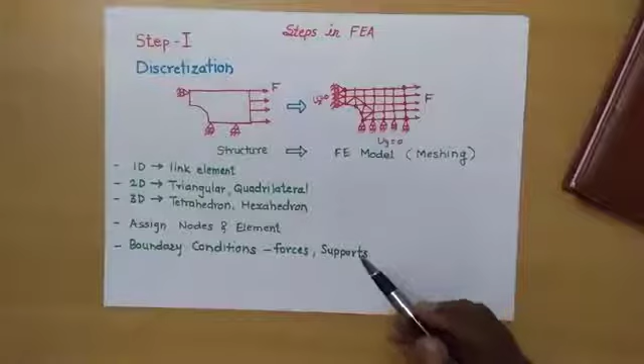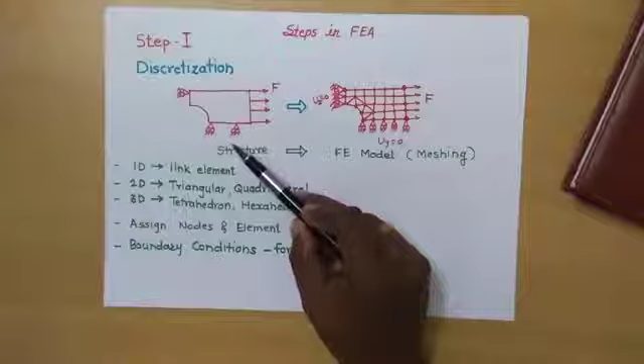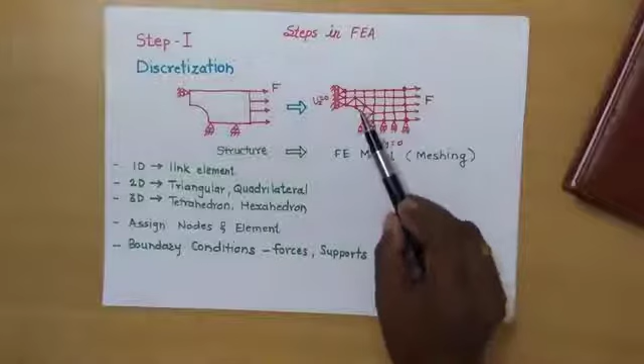We will start with step 1, which is discretization. In this discretization we will get some problem, and any problem, structural or otherwise, is converted into a finite element model. This finite element model is a combination of nodes and elements. The formation of these nodes and elements is called meshing in finite element analysis.

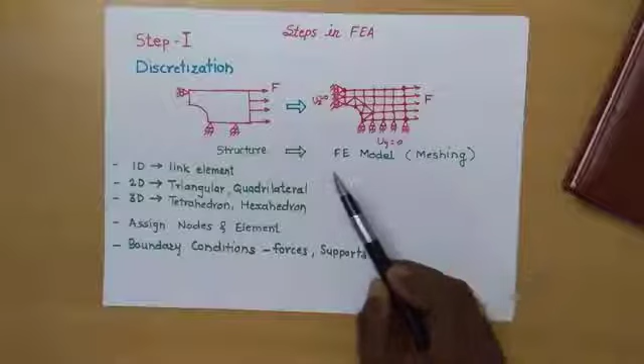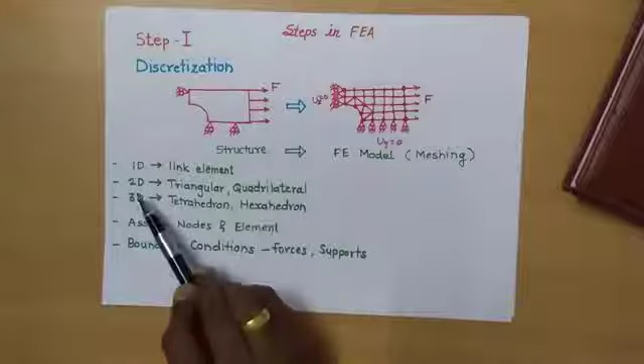We can convert according to the problem. If it is a 1D problem, we can convert it into a link element. We can use a triangular or quadrilateral element if the problem is 2D. If it is a 3D or solid problem, we will use tetrahedron and hexahedron elements.

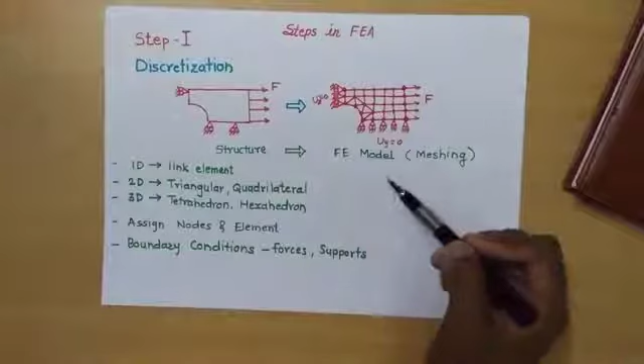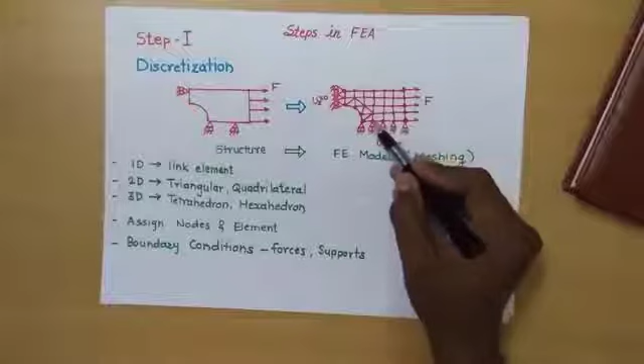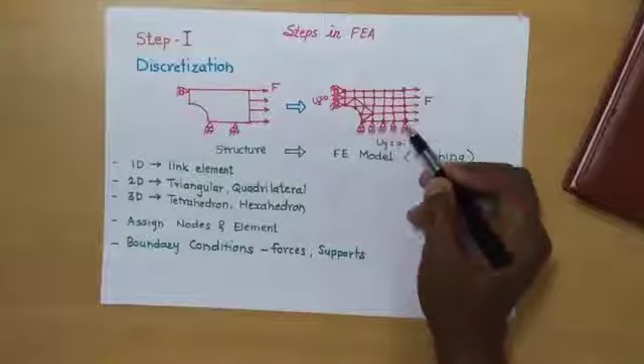We have to assign total nodes and elements in the system. For example, here we have defined this structure into a finite element model. We can assign numbers from here, 1, 2, 3, 4. Likewise, we will give the element numbers, and according to that, we will give node numbers. These are the node numbers, and the next step is to define the boundary conditions.

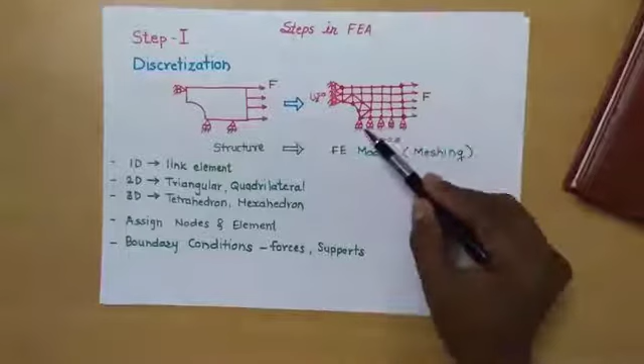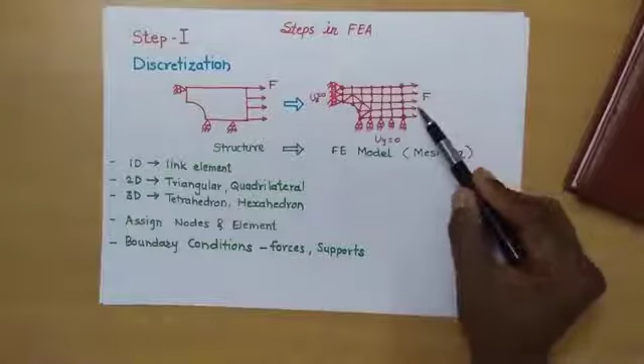Here we have some fixed supports and roller supports. Accordingly, for particular nodes we give the supports, so this displacement is 0, this displacement is 0, and force is applied on these nodes. So we convert the structural problem or any other problem into a finite element model. This discretization is the first step.

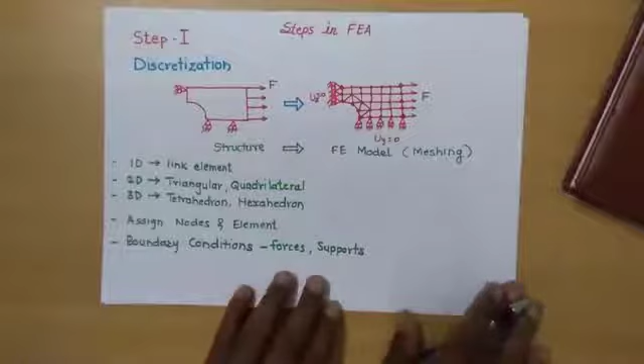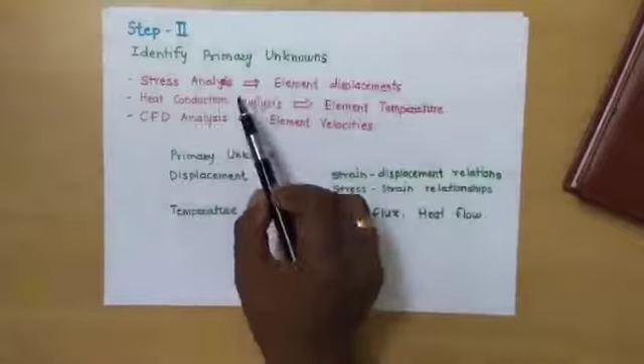Second step is identifying the primary unknowns. What do we mean by primary unknowns? We get the first unknown, which is displacement in structural analysis. This means if we do the structural analysis for stress, we have to find out the displacement first.

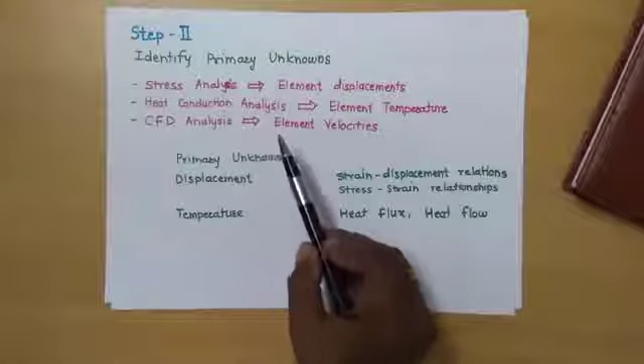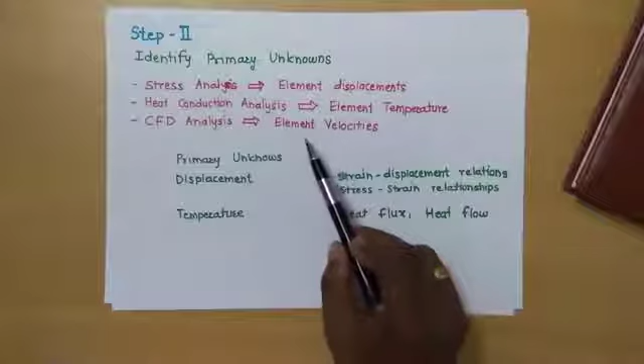Then we will see heat conduction analysis. In this analysis we need to find out the element temperature. So this basic unknown is called a primary unknown. In CFD analysis we have to know about element velocities. Then we can find out different unknowns required in this analysis.

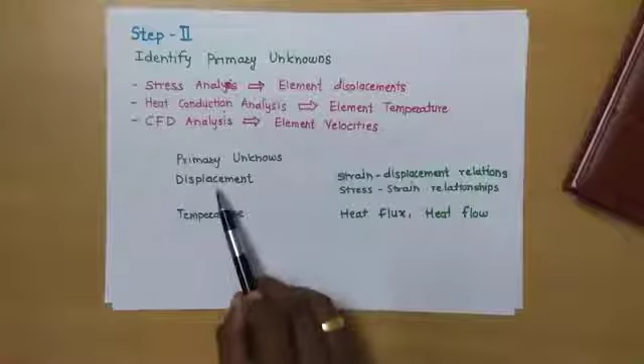For example, here it is displacement, so the primary unknown is displacement. The secondary unknowns become stress and strain. Stress and strain can be found out using the stress-strain relationship or strain-displacement relationships. These relationships come from the theory of elasticity.

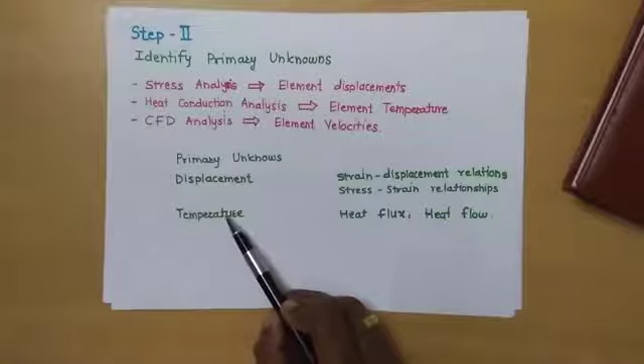If we know the primary unknown, temperature, then we can find out the heat flux and heat flow using some relations. Those are called secondary unknowns, and these are called primary unknowns. So identify which is the primary unknown in your problem and then start.

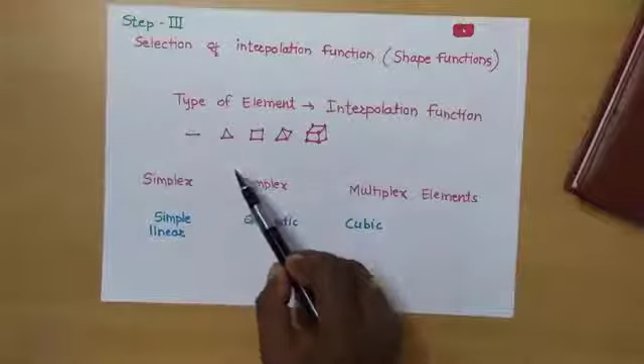So our next step is step 3, selection of a proper interpolation function. Interpolation functions are also called shape functions. In this problem, if we define it with the help of these elements, we need to define a proper shape function for these elements.

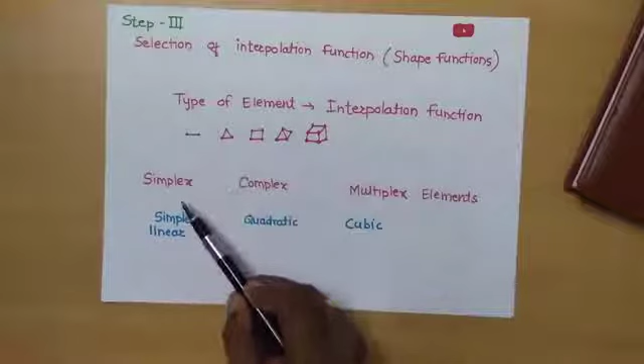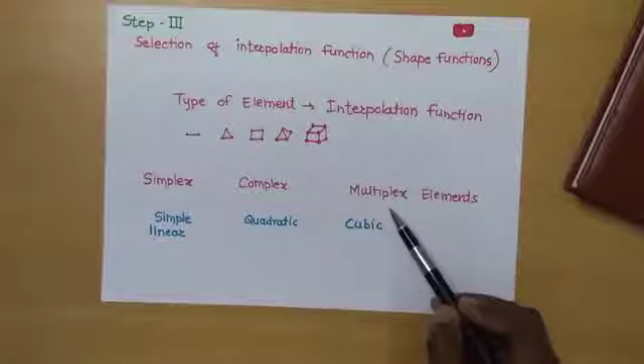Suppose the elements are simplex elements, we will use simple linear polynomials or interpolation functions. If it is complex, then we will use quadratic shape functions. If it is multiplex elements, we will use cubic shape functions. You can find an explanation about simplex, complex and multiplex elements by clicking the eye icon here.

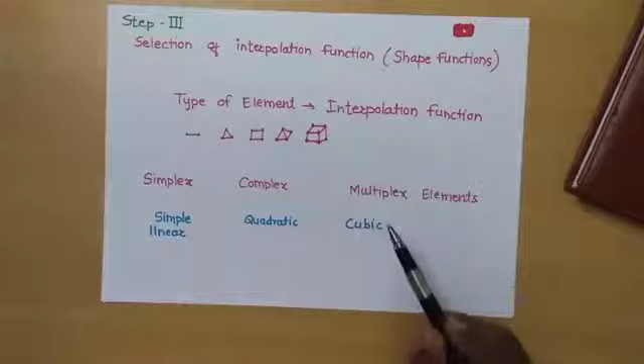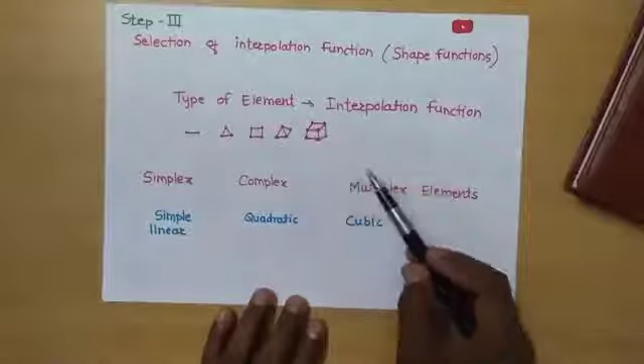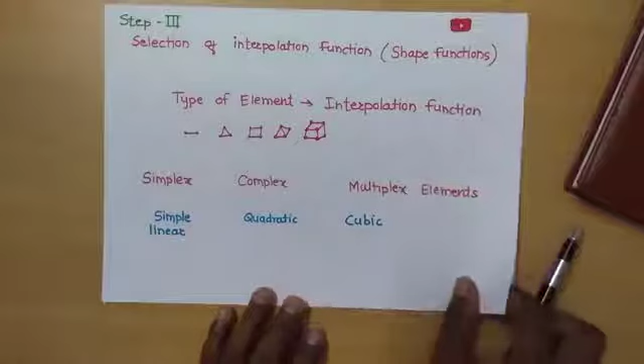Interpolation functions define the shape functions because we get the values at the nodes, and intermediate values in between the elements we get using these shape functions. That's why shape functions are more important to get accurate results, because nodal values may not be accurate if we solve it the linear way. So we need more complex and multiplex elements, and quadratic and cubic shape functions.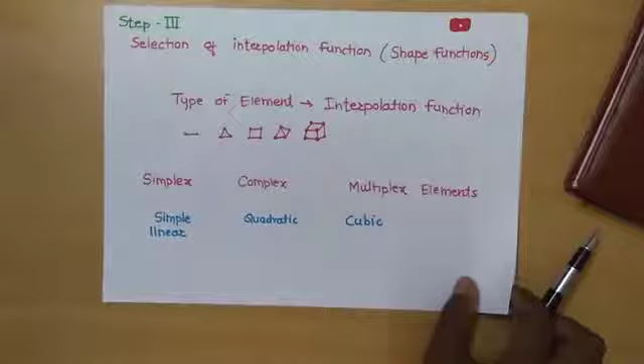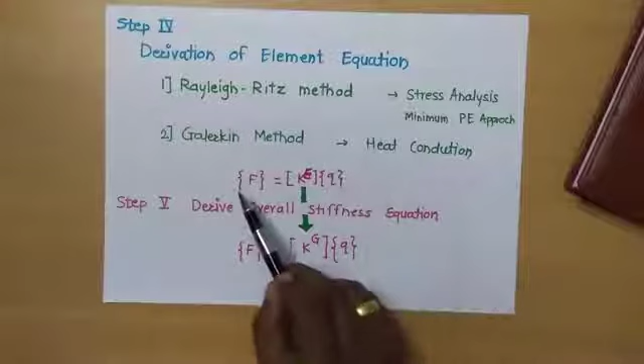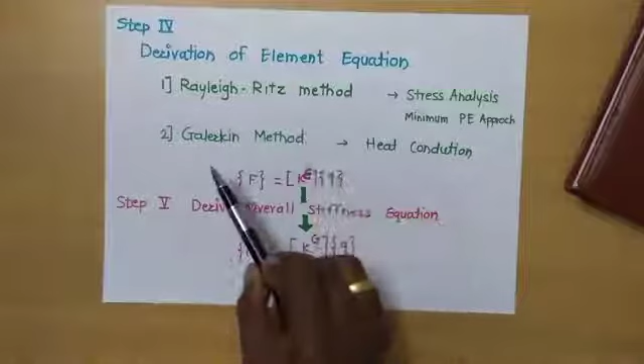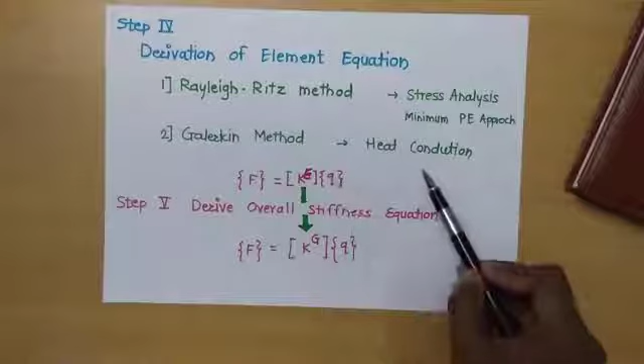So we use the minimum potential energy approach in the Rayleigh-Ritz method, and for some problems we use the Galerkin method. So for each element we will get force is equal to stiffness into displacement, and then the next step is step 5, derive the overall stiffness equation.

Means if there are n number of elements, we will get n number of equations, one for each element, and these n equations we need to add together to get the global stiffness of that system. Forces are added accordingly, and we will get the force vector. Displacements are added accordingly, and we will get the displacement vector.

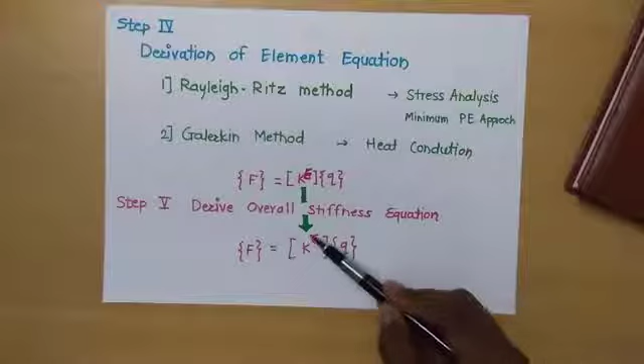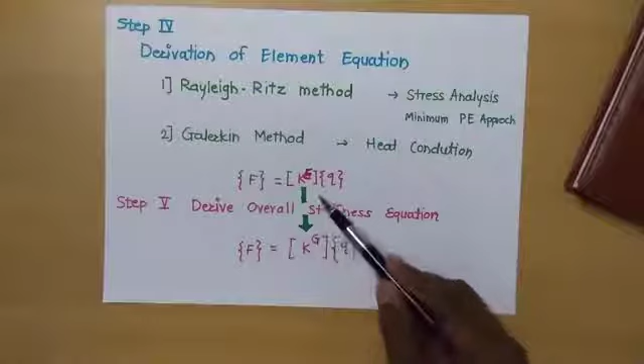To form this global stiffness matrix, each element is connected to the next element with some nodes. According to that, we will connect all these elements together to form the global stiffness matrix. So this stiffness matrix gives you the whole stiffness of your problem.

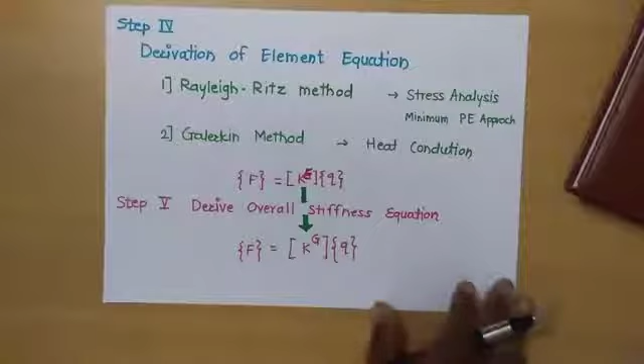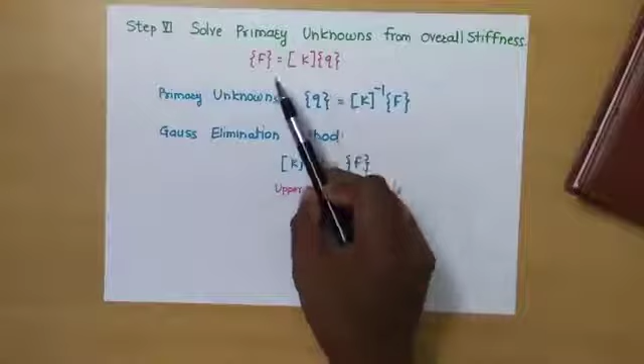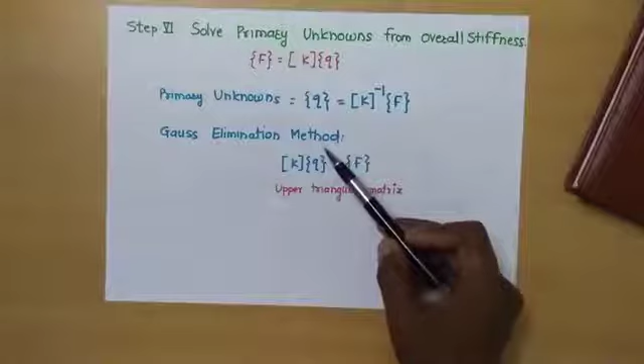Now once we get the whole system equation, that is force is equal to stiffness into displacement, we have to solve these system equations to get the primary unknowns from this overall stiffness. There are many methods we can use to find this Q value. Q is the primary unknown. We can simply take the stiffness matrix to the other side, make K inverse and multiply by the force vector, so we will get the displacements directly, or we can use the Gauss elimination method.

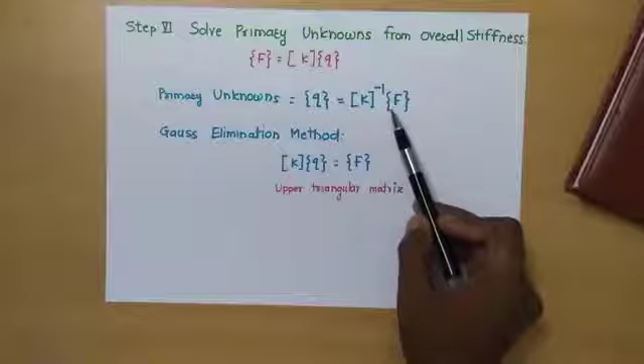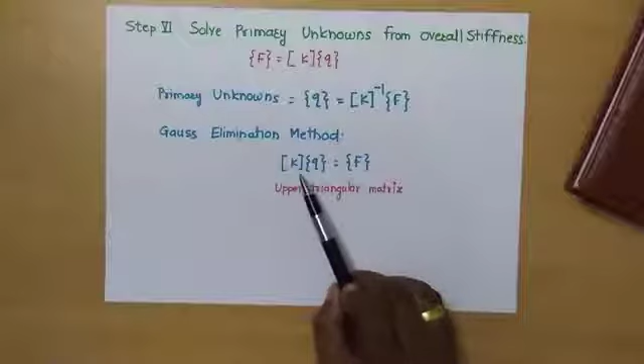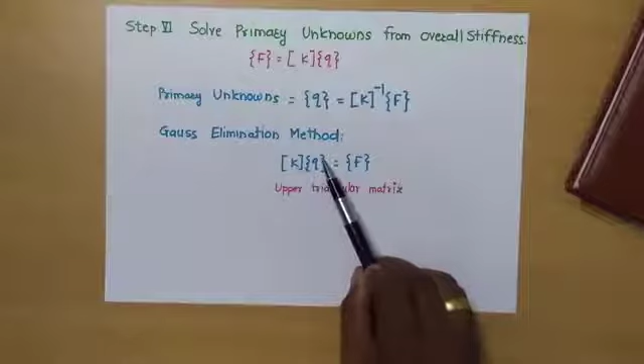What happens in the Gauss elimination method? We have to convert this stiffness matrix into an upper triangular matrix, and one by one, starting from the last value of the displacement, we will get the exact value for this last displacement. So likewise we can solve these equations simultaneously. We will get all these primary unknowns, and we can use relations again to get the secondary unknowns. This is step number 6.

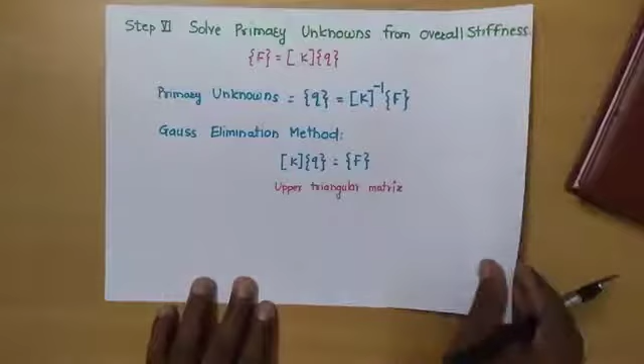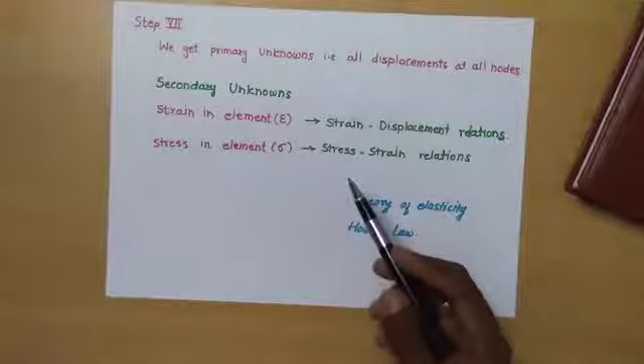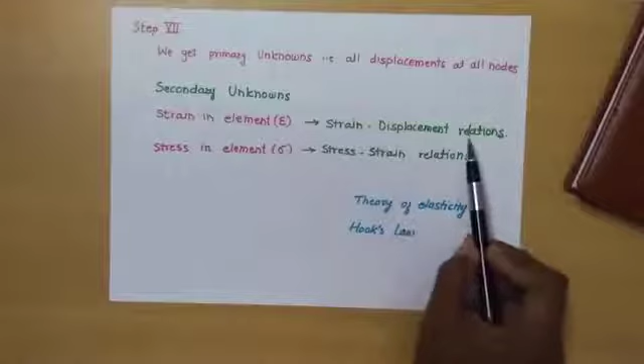Step number 7 is to get the secondary unknowns. Once we have all the displacements, we have the displacement vector. If we want to find the strain, that is epsilon, we use the strain-displacement relationship, which comes from the theory of elasticity. We can derive these relations, and if we put the value of displacement in that equation, we will easily get the strain in each element.

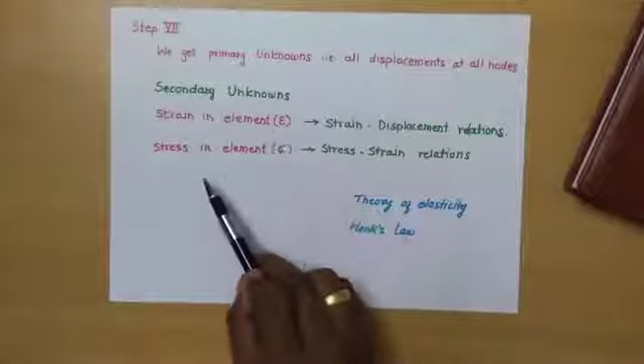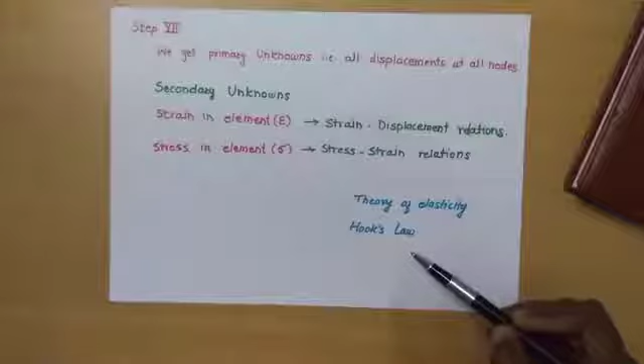If we want to find the stress in the element, there is the stress-strain relationship, derived from Hooke's law. It is applicable for 1D, 2D and 3D. So if we know the strain, we can find the stresses in each element. Now if we want it at the middle of the element or somewhere inside the element, we can use the interpolation function, that is the shape function, to find the stress inside the element.

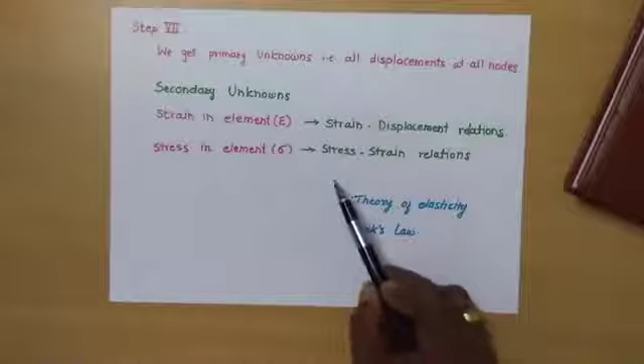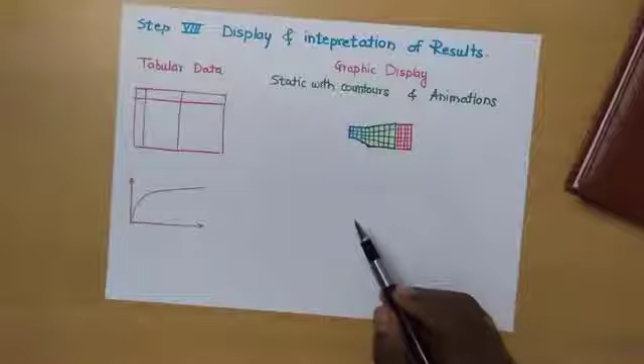Okay, and the last step is step number 8, display and interpretation of the results. Once we are done finding the primary unknowns and the secondary unknowns, we have to collect the result data. There are two methods: the tabular data method, and second, the graphical display method.

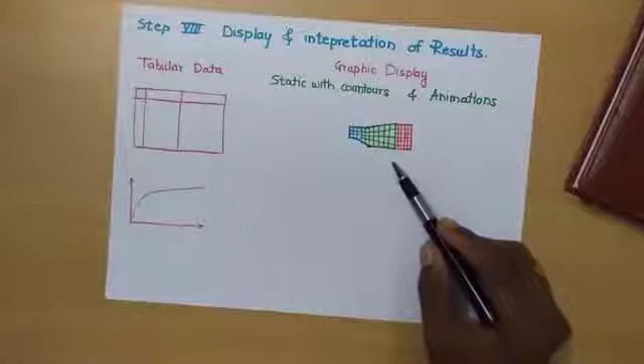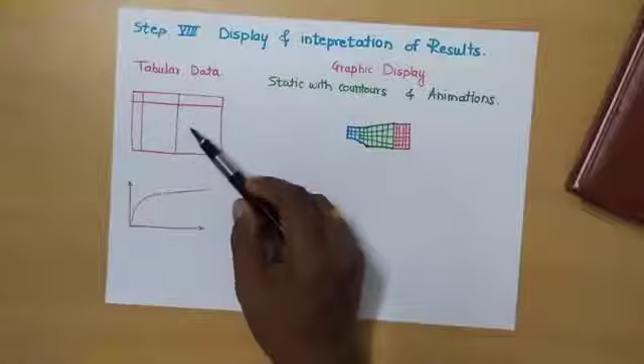In tabular data, we can prepare a table accordingly. In that there will be elements or positions with their stresses and strains. So we can give the tabular data. By using this tabular data, we can prepare a graph on the x-axis and y-axis, or use any other method for graphical representation. So it comes from the tabular data.

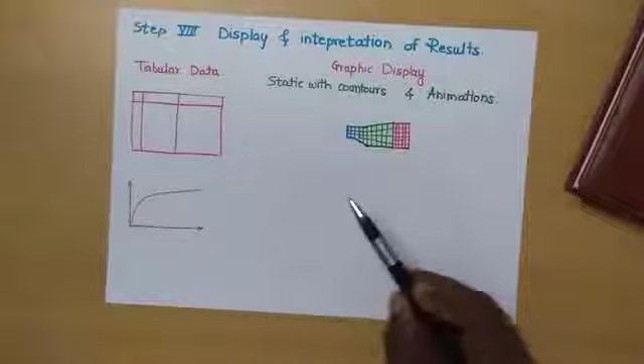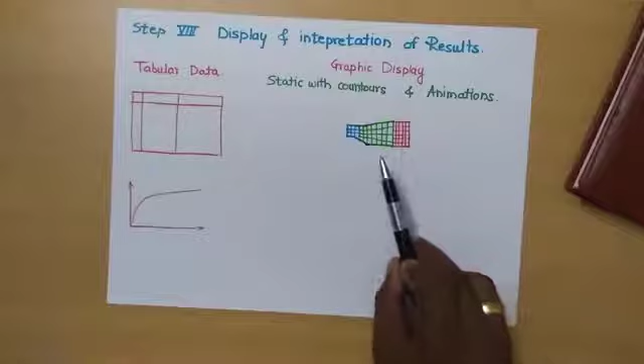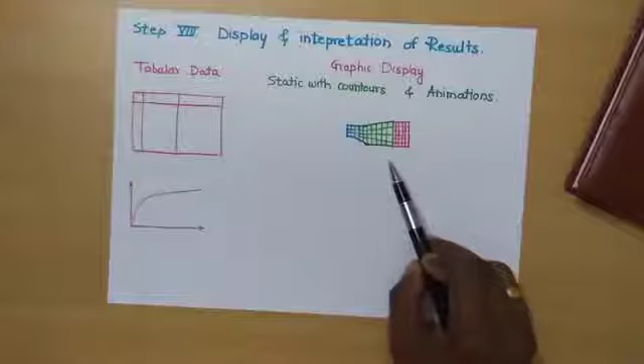And the next is graphic display. Graphic display means we use graphics; suppose this is a plate which is stressed, we will get maximum displacement here and minimum displacement on this side. So we will get static contours, and we can play animations. Animations show how the value changes from minimum to maximum or maximum to minimum. We can save that as a video and show it in a presentation.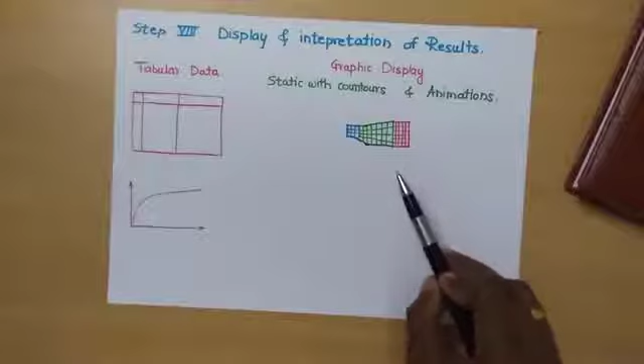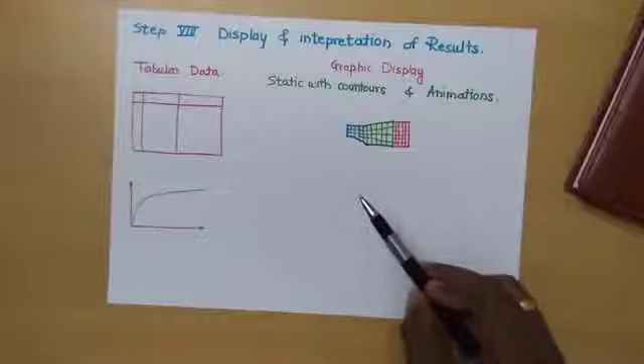In that we can explain how the load is going to vary and how the von Mises stresses are going to vary. Then we will reach the conclusion about the finite element analysis, or finite element method, of the total problem. So basically it has 8 steps, and they are explained here.